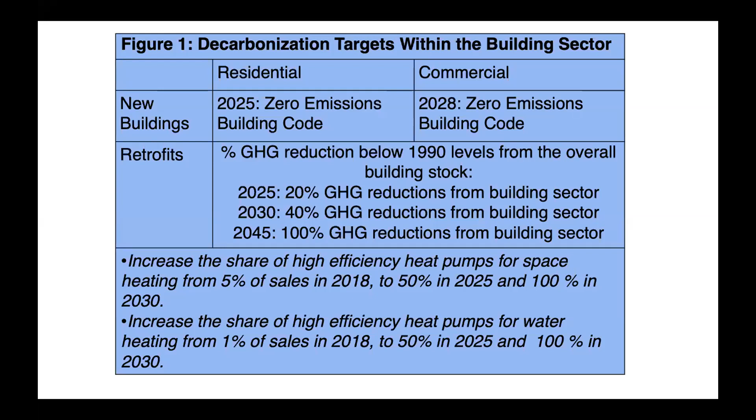We released a roadmap a little over a year ago that called for the total decarbonization of California's buildings and laid out a pathway for how we think we need to get there. Key to that was calling for all new buildings being zero emission for residential buildings no later than 2025, and for commercial no later than 2028, and calling for a full decarbonization of the building stock by 2045 or sooner, which would include the stopping of sales of gas appliances after 2030 in California. And so you can see the goals that were outlined in the roadmap up there on the screen.

And inherent behind those numerical goals were some overall philosophical goals about key areas of the market that are going to have to be achieved if we're going to meet our goals. And they're up there on the screen, but this webinar series really represents that first goal, is how do we build customer, builder, contractor, policymaker, really everybody awareness around the benefits of all electric living and decarbonized buildings. And so this webinar series is one way that we seek to try to build awareness. We try to bring in some of the top thinkers, some of the top doers in this space to be able to provide input and their expertise and advice about building decarbonization.

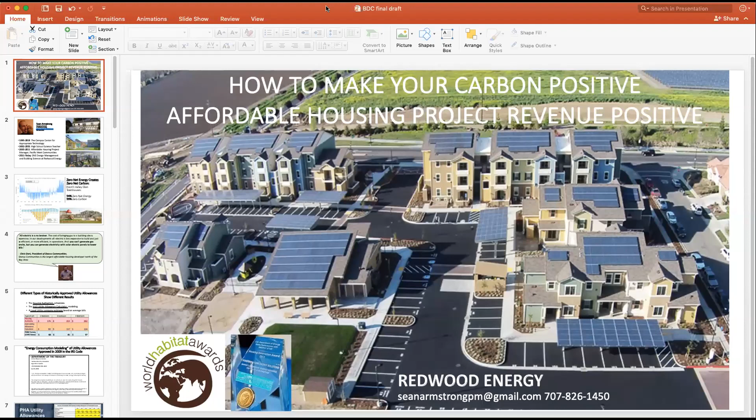So Sean Armstrong is very much, I'm going to go ahead and say, a global leader on building decarbonization. He's been doing this for a long time, and he's focused his efforts in and around the affordable housing field. And so he's had to work in what I would say is one of the hardest building types when you have to work in affordable housing to make things work. And he's developed techniques and tools that actually make it one of the best building types to be able to do carbon neutral, zero net energy, carbon positive type projects.

He got his education at Humboldt State University. He's a fantastic father. He's a great husband. He's very active locally in his community. He's a farmer, and somehow he still finds time to be responsible for more zero net energy, zero net carbon affordable housing units than anybody else in the country.

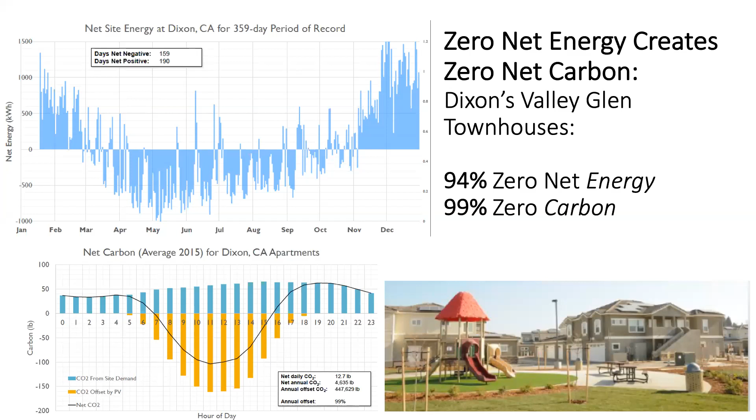It obviously consumed carbon during the wintertime, and it decreased the amount of carbon intensity in the grid. It compensated for itself during the summer. So we have a 99% zero carbon development. It's actually just 2 water heaters not working correctly that tipped it to 99% instead of better. This is a project for farm workers in Dixon. It's close to Sacramento. If you eat almonds, these are people who are growing your almonds for you.

So this is my former boss, Chris Dart. And this quote, I'm just gonna read to you. All electric is a no-brainer. The cost of bringing gas to a building site is expensive. In our developments, all electric is less expensive to build and just as efficient or more efficient in operations. And you can't generate gas on site, but you can generate electricity with solar electric panels to lower your bills.

We became the largest affordable housing developer in the northern part of California, north of the Bay Area, through the strategies I'm going to explain. There's really no subsidies up here. The redevelopment agencies were closed at the same time as we were starting the business, essentially. And as a consequence, we had to be extremely innovative.

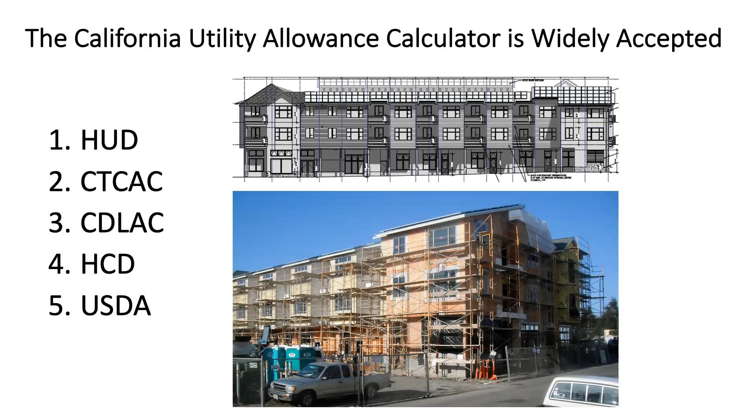So this is one of the developments I'm really proud of. I got this funded in 2008. It didn't actually get built until 2012 because of the recession that started right at the moment that we got the funding. So that slowed us down.

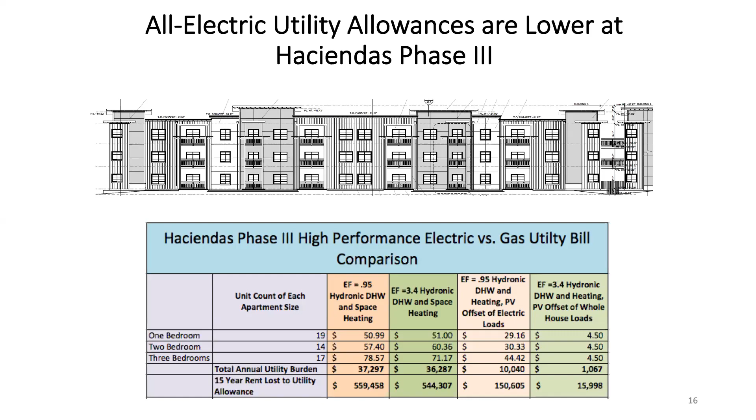People are excited about solar, but they mostly think it's expensive. In this case, this was the linchpin part of the financing for the first tribal housing ever built in California with state funds.

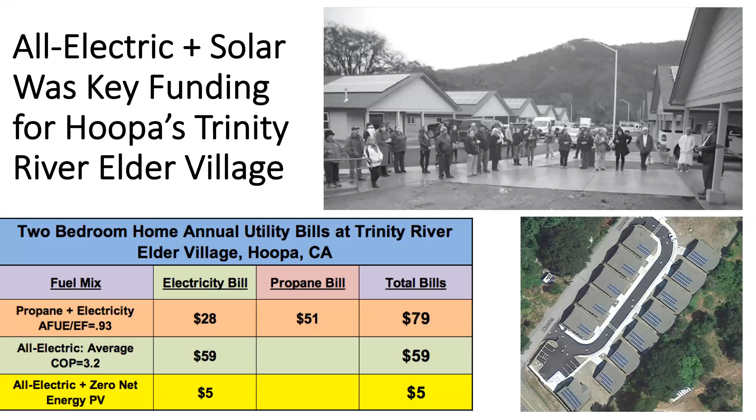So just explain what is the process of doing this? At the beginning, you meet with the client and you say, what's your rental revenue and operating budget goals? Do you guys want a $5 utility allowance? Does that make sense? It doesn't always, so it's worth having a conversation. Like if there's Section 8 housing vouchers, maybe that's not going to work out.

We do an energy model. It takes a while to do a really excellent model of a big set of buildings, and it has to be very accurate. It gets plan checked and such. And then we create a draft and we talk about it with the client, and it gets submitted for financing.

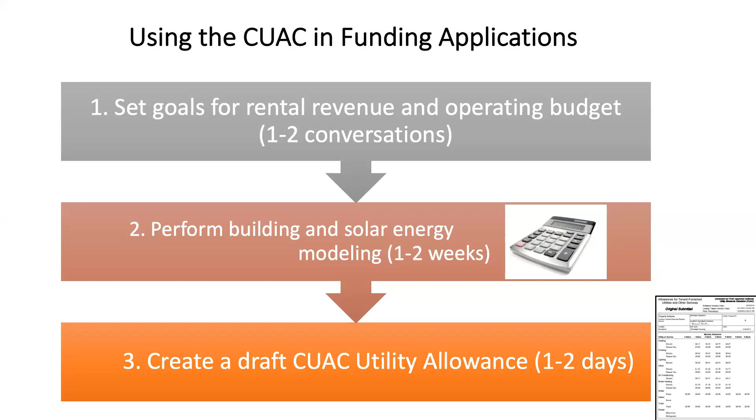Then after the project's funded, in the design development for construction drawings, the final drawings, you usually do some value engineering again, where you decide like what are the efficiencies of the windows and how much insulation, because they all have costs and benefits. Then you build it and you document it, and then you submit it to, in our case, to TCAC for funding approval.

If you're in Florida, there's 3 pre-approved vendors, and it doesn't get submitted for plan check. Instead, these 3 vendors are trusted to do such a high quality job. I believe in plan check, but that's how Florida works. And you're done, and you have this utility allowance that gets updated annually for the next 15 years.

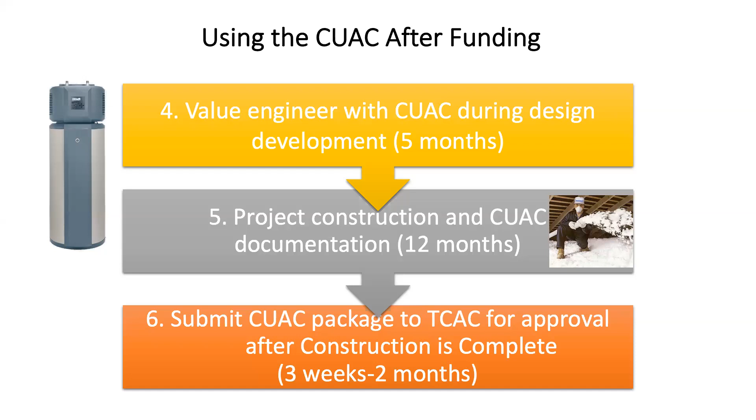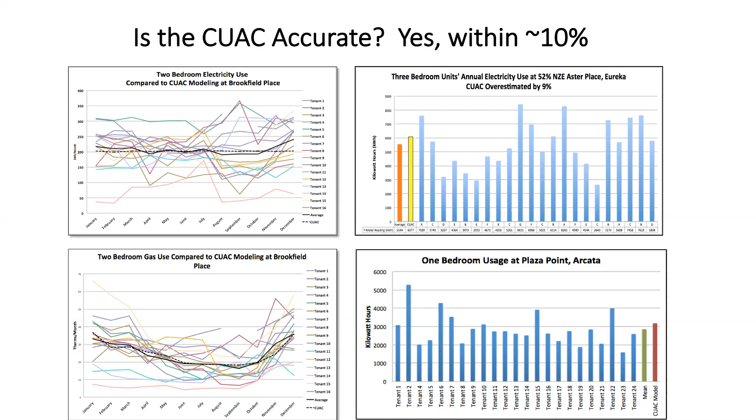So getting an average that's accurate to the average is an accomplishment, and just to applaud what building science can do. We can predict averages pretty well these days. Here's Chris again. So I wanted to focus on the first half of what he had to say. The cost of bringing gas to a building site is expensive. In our developments, all electric is less expensive to build and just as efficient or more efficient in operations. We'll go through some slides to illustrate that.

Okay, so first off, nationwide electrification trends: since 1993, we have been building as a percentage of housing more and more all electric. It's been concentrated in the South, where warmer temperatures have allowed warm climate heat pumps to work. We started getting cold climate heat pumps in 2000. I installed one in my house in 2009. And their electronics inside of them allow them to still produce heat at like -20 Fahrenheit, where before they would stop at about 35 Fahrenheit. So we picked up like 50, 60 degrees of additional cold weather that you can still heat through.

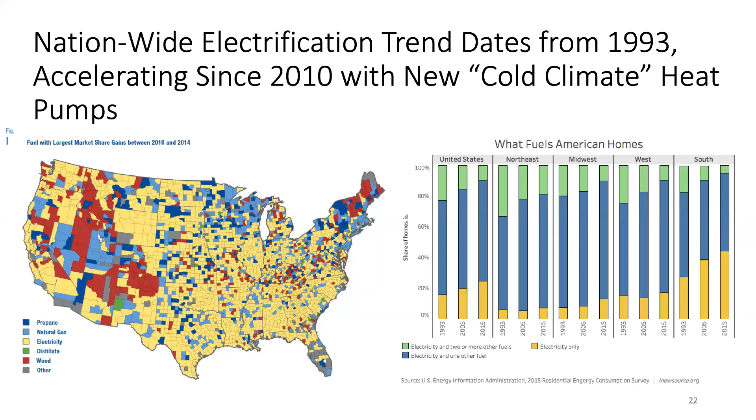The Propane Education Research Council hired ICF to tell them why their propane sales were declining. And the answer was because of heat pumps, the ability to use a reversible air conditioner, which is a heat pump. It just is an air conditioner that works in reverse. It is the exact same thing. It's just cheaper and easier to do that than to deliver gas to a project and then put in gas appliances.

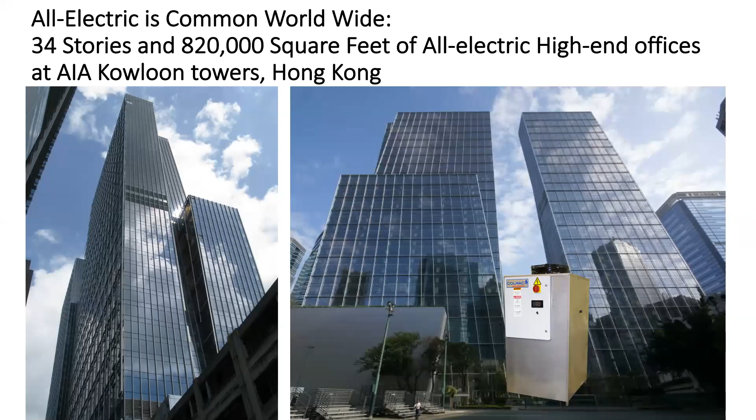This is true in Vancouver. I'm just going to show some places around the world. This is not just a US phenomenon. 9 out of 10 townhome projects in Vancouver are all electric. It's true in Hong Kong. This is an all electric office building. The water heating is being done with a central system that's done by Colmac. You can see an image of the Colmac water heater there. And the scale of the building does not matter. All electric is something you can develop in any building, period.

So it's incredibly expensive. They get this fuel, it arrives, they have to reprocess it because it's not actually natural gas, and then they put it into the pipelines. And most people just don't want to bother. It's just so pricey to get it there. And lots and lots of buildings were built in the 60s and 70s before there was natural gas, or the equivalent of it, before it was even available on the island.

So like everything that you ever saw Elvis in Hawaii, that was all electric. All the fun movies from the 60s and 70s when Hawaii just sort of became a thing as it became a new state. The whole mystique of Hawaii is built off an all electric building plan. When you go there and you stay in some Airbnb or whatever, much more likely than not, you're gonna have an electric kitchen.

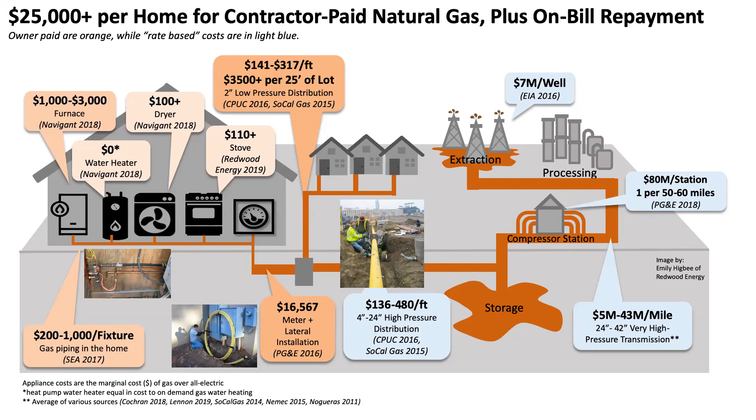That is the difference between a heat pump and an air conditioner furnace. That's just true across the market. It costs more to add a gas burning box to an air conditioner than it costs to add heat pump functionality to that air conditioner. And it's not a little bit, it's a fair amount actually.

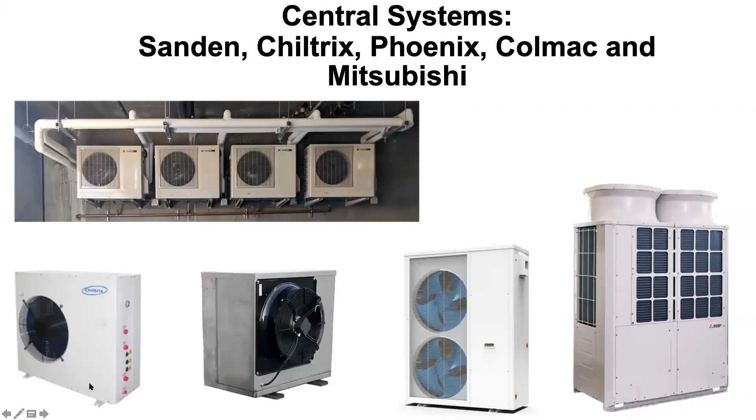Earlier we mentioned that one of the trickier things to do in apartment complexes is to make a heat pump water heater serve the whole building. Heat pumps don't work the same way as gas, so you have to learn a new and different design strategy. But once you know that strategy, then it's simple. So it's not like it's more difficult than putting in a gas boiler. It's just different. So you need to know how to size usually double or triple the amount of tank storage for water. That's the main thing.

And you also try to split the heat loss of the recirculation loop. You try not to put that straight through the original heat pump. You may have a separate heater for it. And those two strategies of heating the recirc loop separately and putting in more storage are the design solutions for heat pump water heaters. And you can see on the left, Chiltrix, Colmac, Space Pack, and then to the right there, that's Mitsubishi. These are all heat pumps that are essentially doing the same job. And that up on the top there, that's the Sanden. That's very popular in California.

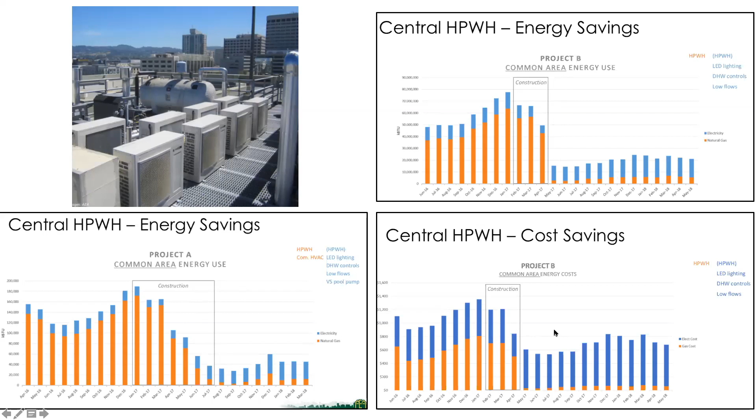There is a misunderstanding out there that gas is cheap. People say this as if those words were backed up by fact, and they're not. It's distressing. It distresses me to see the gas companies having succeeded in what I consider a propaganda effort to just make a phrase stick in people's mind. So gas is not cheap.

What is going on is that when people need gas the most, it costs the most. And it doesn't cost like a little bit more. It often costs 10 times as much in the month of, say, February. You have your peak usage, and gas prices will go through the roof. And people will suffer that month and then forget. And they won't do the analysis to say, well, what was the price for the whole year? Not the average price of gas, because we're not using gas the same way all year round. We want to know the seasonal price of gas when we're actually using it in gargantuan quantities to stay warm.

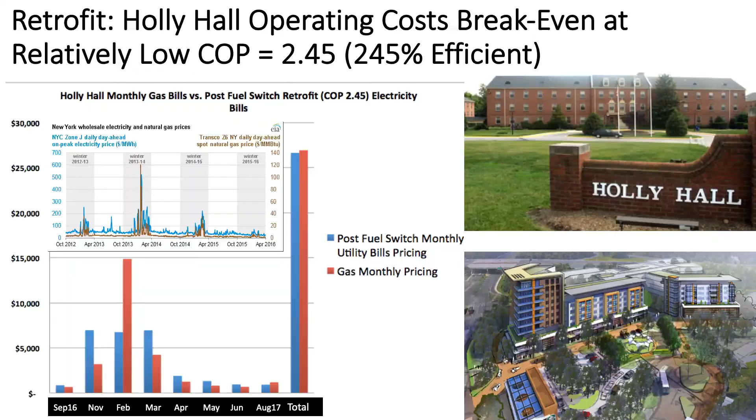It's usually easy, in our country, nationally, to beat gas in most markets. It can be trickier in California because we have very high electricity prices, some of the highest in the whole country. But on average, throughout our country, in about 2/3 of the states, it's significantly cheaper to run on electricity.